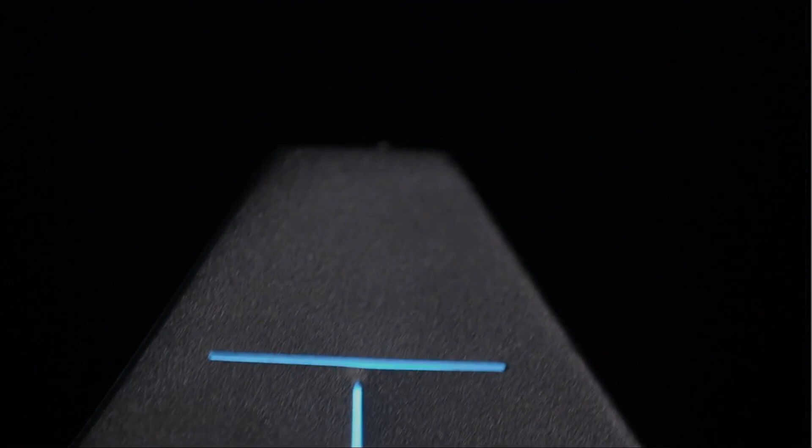Yesterday's thermal conductivity instruments typically limit characterization to a narrow range of sample materials. The samples are often forced to adapt to the instrument's rigid requirements, rather than the instrument adapting to the sample and application needs. Trident by industry leader C-Therm represents a new paradigm in thermal conductivity measurement, delivering 3 of the most powerful transient methods in one instrument.

It's better to have options. Built on C-Therm's reputation for world-class thermal conductivity instruments, Trident is dynamic and satisfies the most prominent ASTM and ISO industry standards. It combines the precision of MTPS with the flexibility of TPS and the robustness of TLS, all in one modular package. These options support a wide range of applications without sacrificing ease of use. Trident meets the needs of today's labs and is future-proof for the challenges of tomorrow.

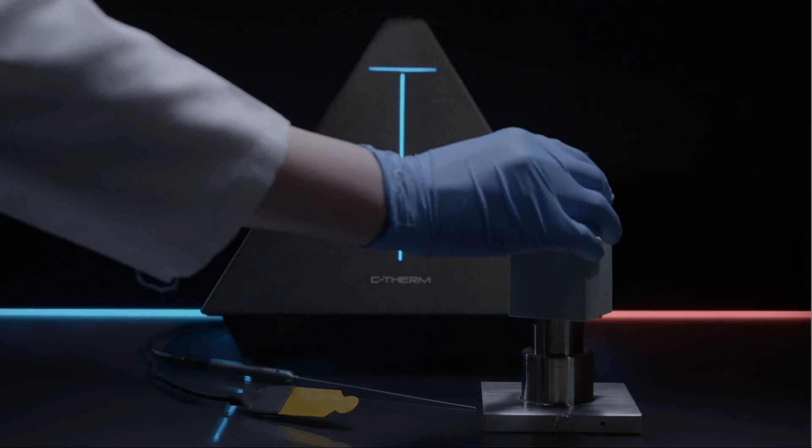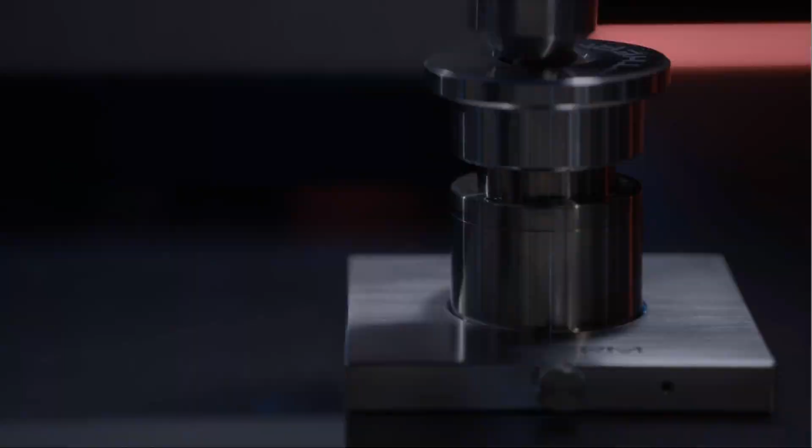The MTPS, Modified Transient Plane Source method, employs a single-sided sensor to directly measure the thermal conductivity and effusivity of materials. The method features the highest precision and sensitivity, providing accurate test results in seconds. It offers the maximum versatility for the non-destructive testing of solids, liquids, powders, and pastes. It is adaptable for high pressure, broad temperature ranges, and environmental conditions. No regression analysis is required. MTPS is the choice method for situations where reproducibility amongst multiple users matters.

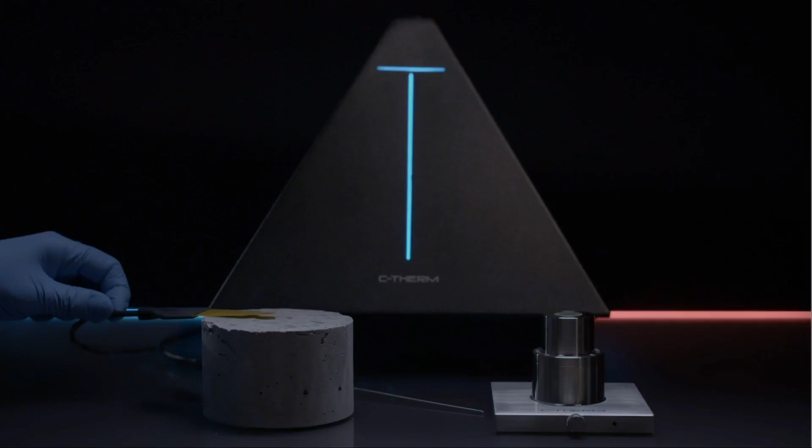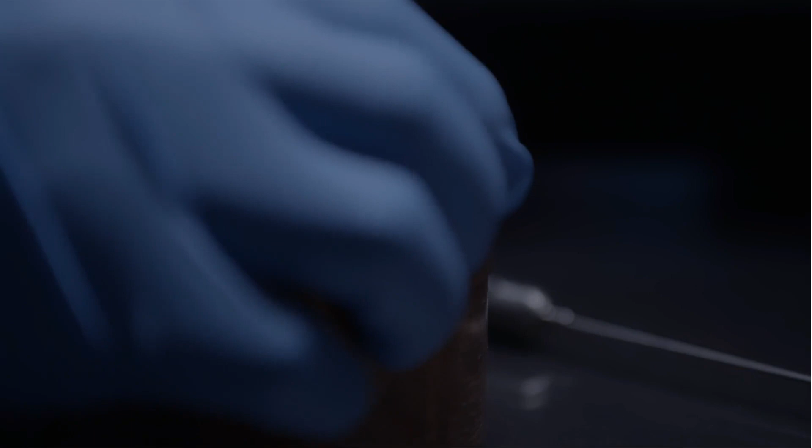With a double-sided sensor available in different sizes, the Flex TPS Transient Plane Source method provides researchers the greatest flexibility over experimental parameters, including timing and power. It is recommended for more experienced users with specialty slab, anisotropy, and thin film modules available. With no contact agent required, the hot disk-style TPS sensor is ideally suited for polymers, compacted geological samples, metals, concrete, and asphalt. Flex TPS is ideal for experienced researchers looking to push the boundaries in thermal conductivity.

Sheathed in stainless steel, the TLS, Transient Line Source Needle method, offers maximum robustness in thermal conductivity testing. TLS is best suited for granular materials, polymer melts, soils, slurries, and gels. C-Therm software provides full data acquisition and analysis in one user interface, allowing full control of all 3 methods: intuitive, logical, easy.

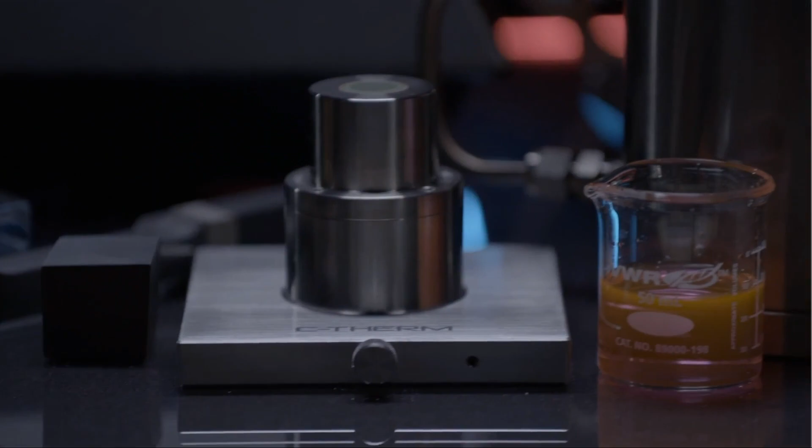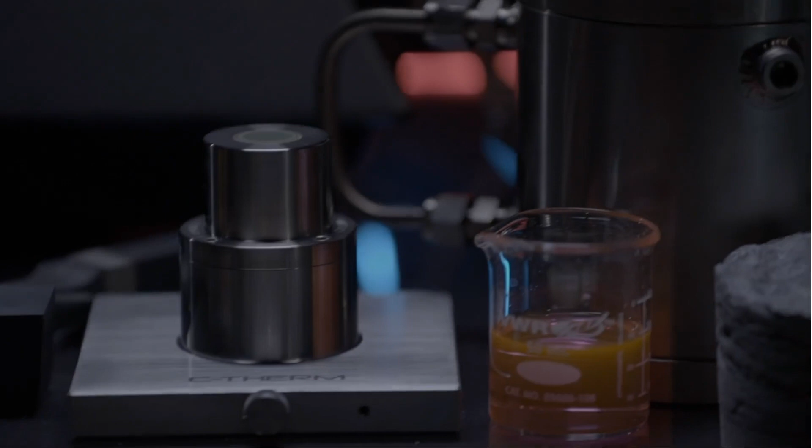Trident reflects C-Therm's years of experience working exclusively to provide labs, researchers, and manufacturers with the very best in thermal conductivity measurement. C-Therm's products are globally distributed in over 65 countries around the world, with full local support. Trident. It's better to have options.

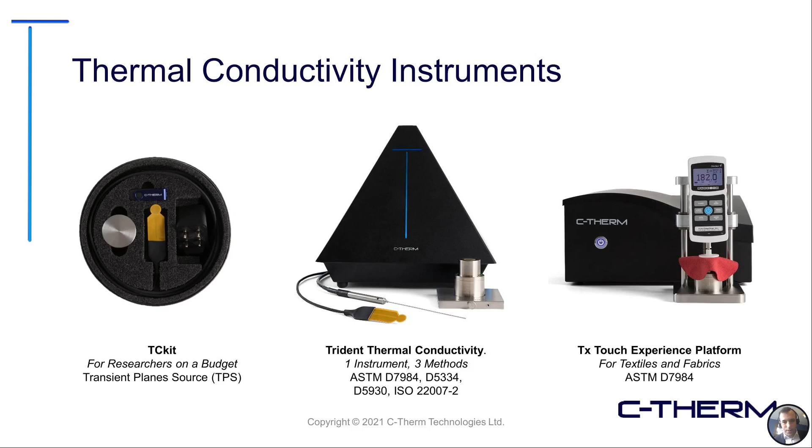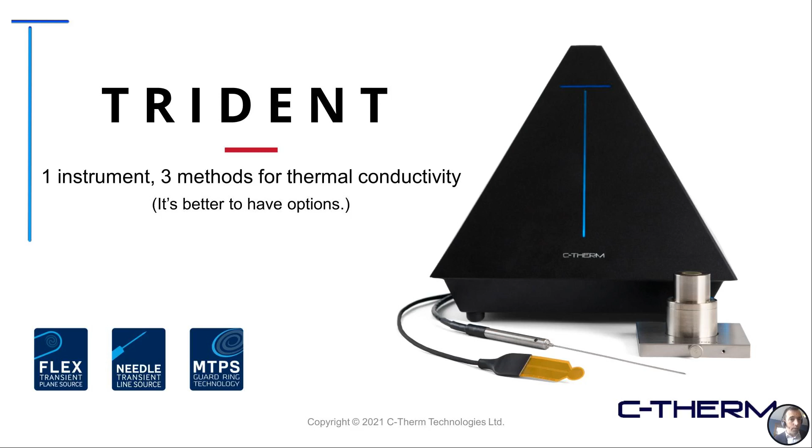So I talked a little bit about Trident and the combination of those three methods. So it's really one instrument with three methods for thermal conductivity. In our view, when it comes to thermal conductivity, it's really important to have options. I really like this quote from Abraham Maslow. If you've seen my presentations before, I think I repeat this a lot. I find it really captures and speaks to the value proposition of Trident.

And it's really that when we talk about thermal conductivity, when all you have is a hammer, if you only have one tool in your toolbox, everything looks like a nail, and you end up force fitting it into areas of application where it is not ideal. So really the value here is giving yourself and your lab the future-proof capability to deal with pretty much any situation, from solids to liquids, etc., all those different types of materials that you may face in your lab.

These are some of the different sensors available. You can see the needle probe here on the top right, just to give a bit of sense of scale and minimum sample volume requirements. The active area of this is about 150 millimeters, so it will require among the larger sample volumes.

Opposite end of the spectrum is a single-sided sensor, MTPS, with an active area of about 18 millimeters. That's roughly the size of a US nickel coin. Offers among the smallest sample volumes. The Flex TPS sensor in the middle is available in different size formats. That's 6, 13, and 30 millimeters in size.

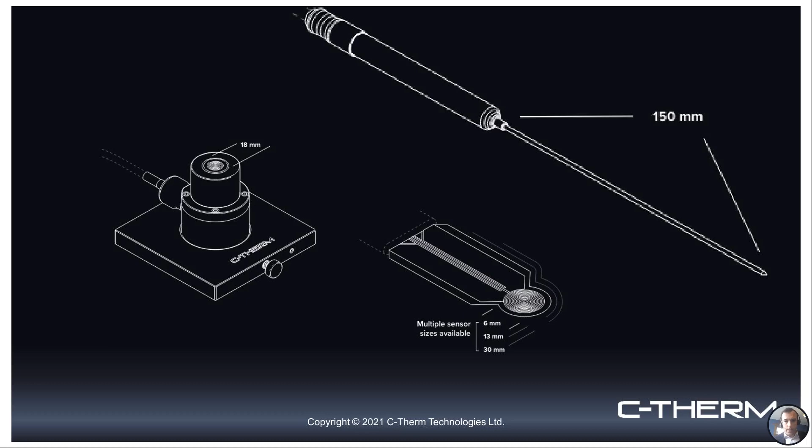Some different accessories available: the liquid and powder cell in the top left and lower left, the high pressure cell. I see some folks online that are involved in hydrogen research. Our unique capabilities with our high pressure cells, being able to measure conductivity and integrate our sensor in those cells, is of direct benefit to hydrogen researchers, where the kinetics of how those materials perform is related to the effective thermal conductivity of the material.

But one thing we really need to be talking more about in industry is that when we're measuring conductivity, we're measuring it under representative conditions. That could include humidity or temperature, but it also matters what pressure we're testing at. So if your material is going to be under a specific atmospheric pressure, it's best to test it under those conditions to truly get a representative value for how that material is going to perform. If you densify a material, for example, you'll typically cause an increase in its effective thermal conductivity. We have special gauges, our compression test accessory in the lower right, to control that very precisely.

So if you're working on a gap pad material, for example, this is very important, because a gap pad material is a thermal interface material. If you apply a lot of pressure on it, it's going to push out any air voids. If it's a filled material, it's going to improve the connection of the additive. It's going to bridge the bond line better. You're going to have a much better effective thermal conductivity on the material. But it's really important that it's representative.

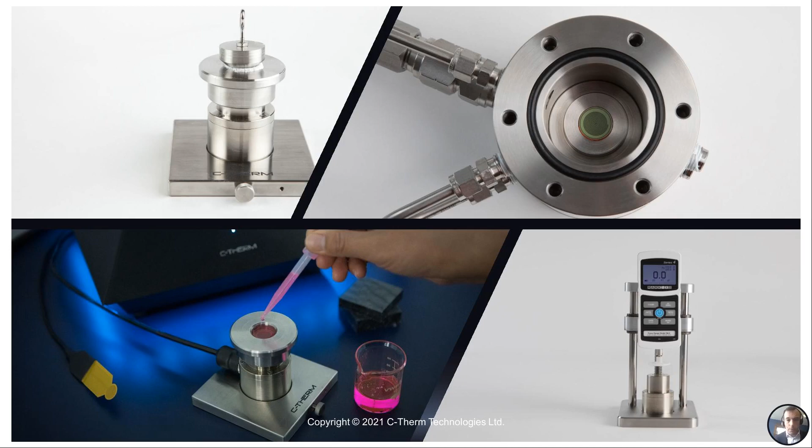So, we've seen examples where results have been presented and they look phenomenal, but when you go into the details of the gap pad and how it was tested, it might have been done with 1 ton force. If you're looking at applying that type of force in your electronics package, that's fine. But I think you risk, in a lot of cases, misrepresenting that real performance.

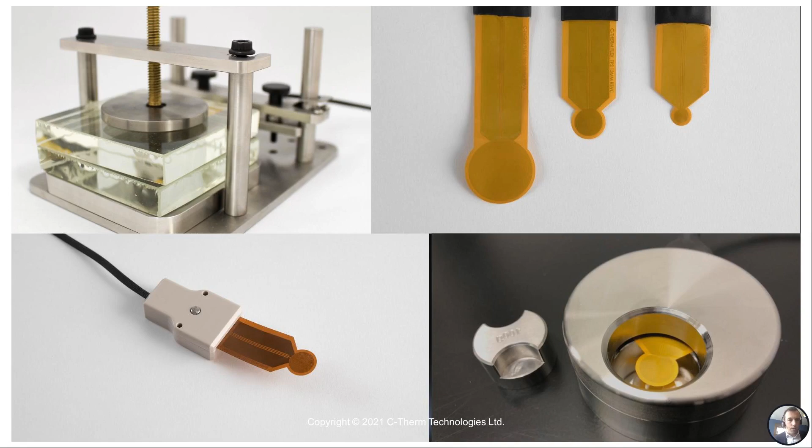The next slide here just gives you a sense of some of those different accessories on the Flex TPS. Top right, you see some of the different size sensors available, the TPS sample clamp, the powder cell, and the high temperature sensor available there. I want to just take a moment to speak to those special utilities available with the Flex TPS. There's the slab TPS utility. So if you're dealing with aluminum sheets or different highly conductive metals, the slab gives you a great solution.

Instead of applying a transient method, which typically requires for the duration of the measurement that heat that's introduced with the sensor stays within the boundary condition of the sample, that condition can be avoided with the slab method specifically, with that utility where you'll input the thickness of the material. And it just gives you an effective way to really deal with high conductivity sheet material.

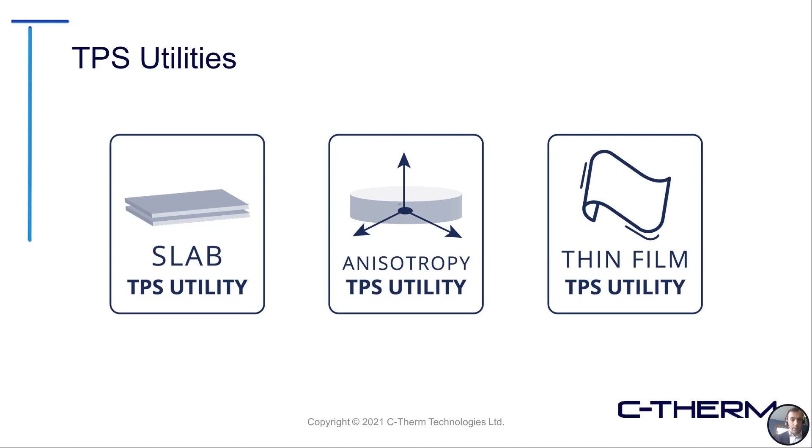The anisotropy utility, great for oriented materials and thin films. We know, of course, in batteries, the separators and some of the other encapsulation materials, it's very important that we have a way of understanding the conductivity of the thin films themselves. A lot of those are used in this space, so a nice capability there.

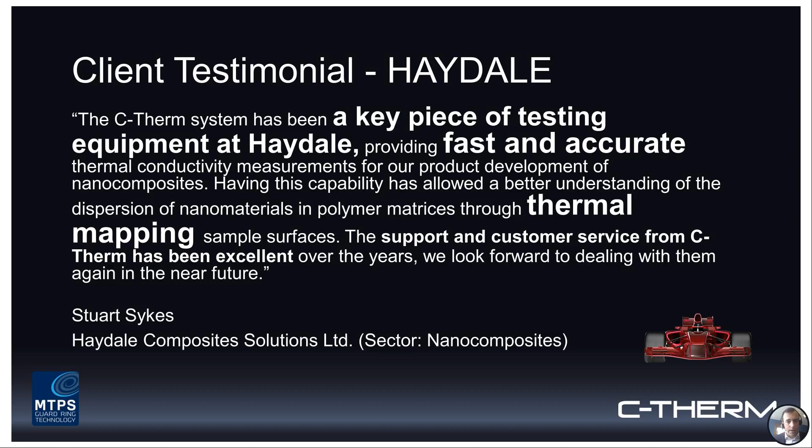And a nice general reflection on what a key piece of testing equipment it has become at Haydale, offering that fast and accurate thermal conductivity testing. And then the last one I'll just highlight here, and it's a quick highlight, is from Covestro. That's formerly Bayer Polymers in Germany. Just talking again about how fast and accurate the capability to measure thermal conductivity of their polymers is.

They're using this both with the MTPS method, which is providing that quick and easy reliable measurement, but they're also using the needle probe for some of their polymer melts. So it just speaks to that value of having a few of those different methods available.

Now, as I introduce my colleague Aria, who's really going to take the reins here and do a deep dive on how C-Therm is helping accelerate thermal conductivity characterization across a broad range of materials involved in the development of electric vehicles, I just wanted to talk a little bit about why speed is so important and the pressure we're all feeling to quickly get to market.

So this is a little bit different than a lot of other application areas where we work with manufacturers, with other technology companies, and it's a very iterative process. It's a methodical process. Yes, there are pressures and there are improvements made in a wide range of these areas, but this feels very different when we talk about electric vehicles. The pressure here, I think, is immense, and it's really important to understand what is happening with the disruption in the automotive industry.

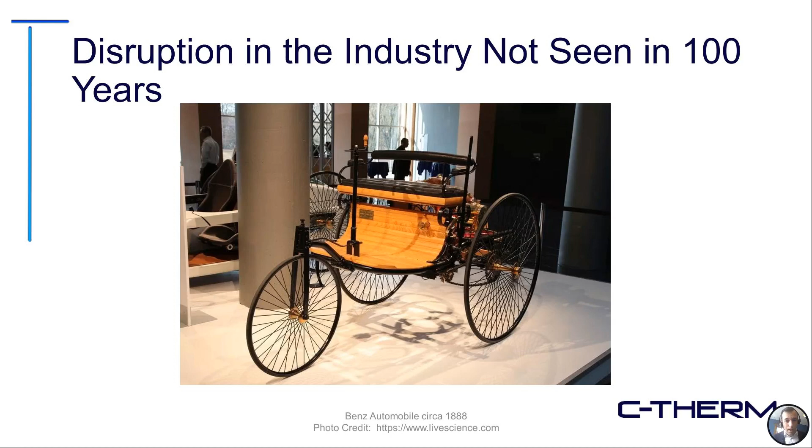And really, I think if we think back in the automotive sector itself, we have seen this. It's just we saw it about 100 years ago. So I think, and I'm going to approximate here a little bit, history was not my forte, but around the late 1880s, you see, I think, consensus around the first automobile really being available or invented. And then it's about another 15 or 20 years before we really see wider scale adoption. So it's kind of interesting if you think of electric vehicles and some of the early introductions over 2005, moving forward. They're there, but you're not seeing that adoption in a mass scenario.

But what's really interesting in this observation is just how fast it flips. It's like a light switch. It goes really quickly once it hits that kind of inflection point. And so there's this really interesting example provided of looking at New York City, Fifth Avenue, circa 1900. So this would be about 12, 15 years after the invention of the automobile. And if you look on this street, a very modern city at the time, you see all these horse and buggies, but you can pick out maybe one automobile.

And then if you fast forward to 1913, so in 13 years, I just want you to reflect on the significance of that pace of change. And you look at the streetscape. It's very difficult to pick out a horse and buggy. They're almost all automobiles at this point. And so it's a good example, I think, of what we're seeing with the challenge of bringing electric vehicles to market, that we've hit the inflection point.

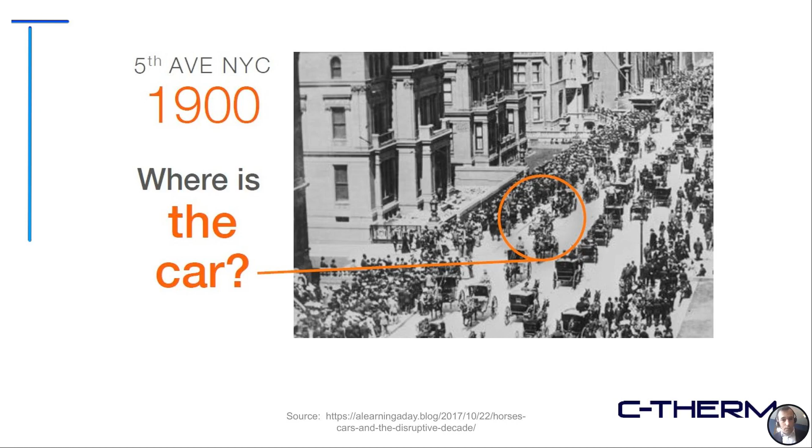So, it's very anecdotal, but if you look at the history, if you look at the experience in terms of adoption and just the general sense of the market, we've hit that inflection point, and we probably don't have as long as we think. If you're one of those horse and buggy producers in 1900, I don't know how many of those survived post 1913. I think they probably thought they had time, that they were on a slow decline, but that they would sustain themselves in a gradually reducing market. And I think what really they found is it was like somebody just turned the lights out on them.

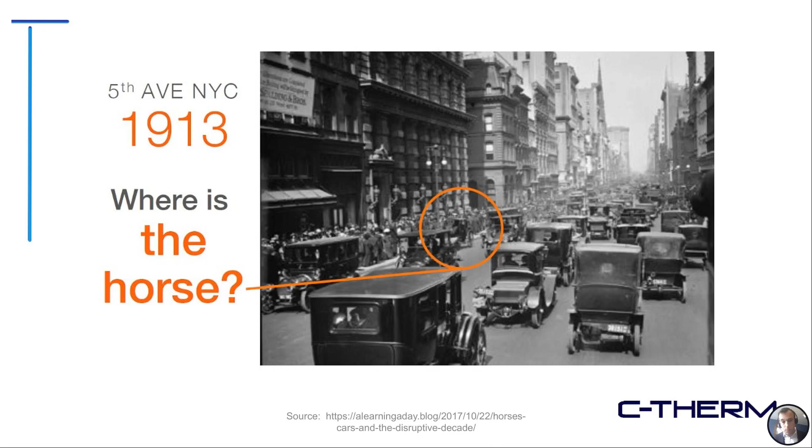And so that's the pressure we're dealing with here when we talk about getting to market with a product that works, that has the safety, that has the performance range, all those things necessary to be successful in the electric vehicle market.

So I want to introduce my colleague, Arya Hakimian. He is a brilliant young fellow, application scientist here at C-Therm. Works a lot with clients in this space. He's going to be highlighting some different work that's been published and some of the work that we've produced internally and giving you a full picture, a survey effectively of all the different materials that are involved in electric vehicles and why and where the thermal conductivity matters.

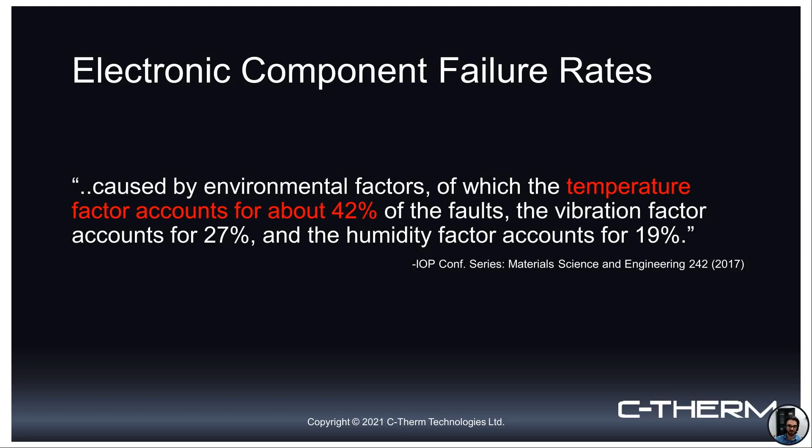A little fact that we pulled here on electronic component failure, just to address the fact that temperature accounts for about 42% of the faults that occur. There are other aspects, vibration, humidity, and then some others that aren't listed. Of course, it's a multifaceted issue, but again, temperature can be viewed as being at the core of some of these issues.

So we're talking about thermal management and issues surrounding that. Really, this can come back to a process called thermal runaway. Essentially, this is where you get an increase in temperature through some sort of reaction that introduces heat to the system, which furthers that reaction. And if you do not have adequate heat escape, whether that's through the process, the materials, cooling systems, whatever that may be, you can get stuck in this feedback loop. And if unchecked, this can result in what we would describe as a destructive event.

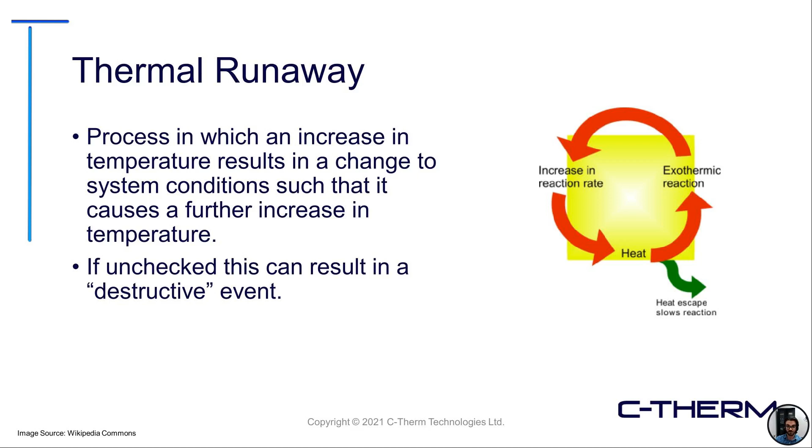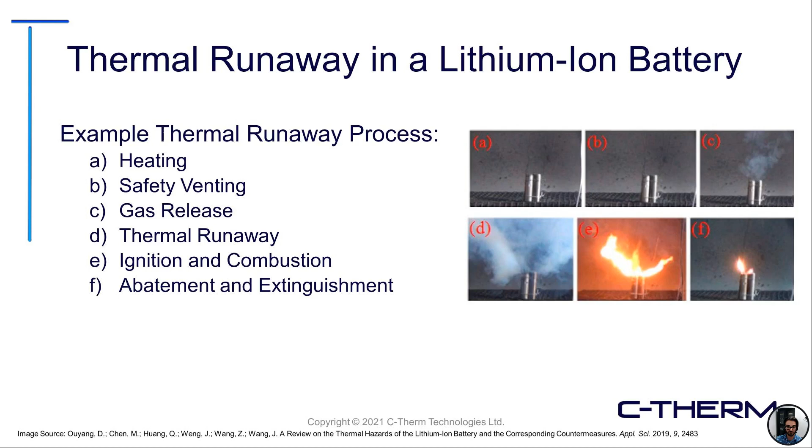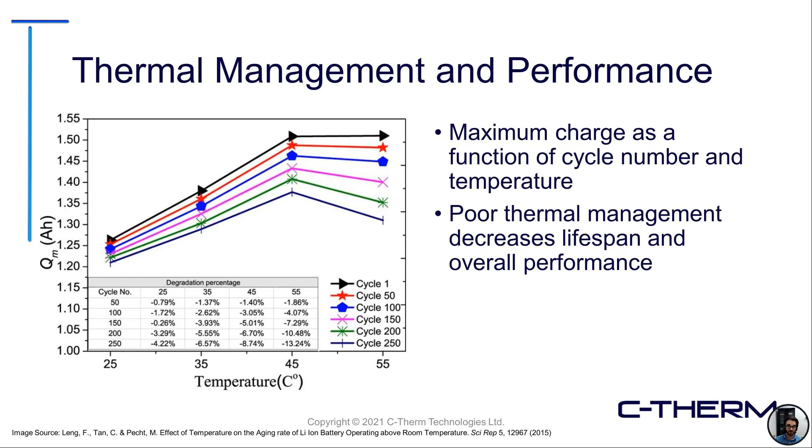Thermal management also relates to performance. So, thermal runaway is a major safety concern, but the performance of an instrument or a device can also be heavily impacted if it is not being accounted for. You can see here just a quick graph. Maximum charge as a function of cycle number and temperature. So again, this is a lithium-ion battery, how often it is cycled and at increasing temperatures. And you can see effectively that over the lifespan of more and more cycles, you get an overall decrease in performance. So whether you're looking at it purely from a safety aspect or a performance aspect, thermal management is really front and center for these emerging technologies.

So how do we cope with this? How do we effectively reduce these risks? Well, essentially your thermal management can come in different forms. There's passive, active, hybrid cooling techniques. I'm sure we're familiar with heat sinks, thermal interface materials, forced air intakes, things like this. But regardless of the type of management that is being introduced, really the components' material selection is going to be very heavily weighted in the overall performance attribute. Whether that's of the pure system itself, of the cooling system, or both, material selection is going to be very important. And what we'll be focusing on today is material selection from the perspective of thermal conductivity being the key design metric.

If you're not familiar with thermal conductivity, at a very high level, we're simply referring to the property that dictates a material's ability to transfer heat. You can see that thermal conductivity has units of watts per meter Kelvin. And this comes from the measure of thermal energy input in watts across a given thickness at a given temperature difference, so watts per meter Kelvin. And really, this is what we'll be focusing on fairly exclusively here today.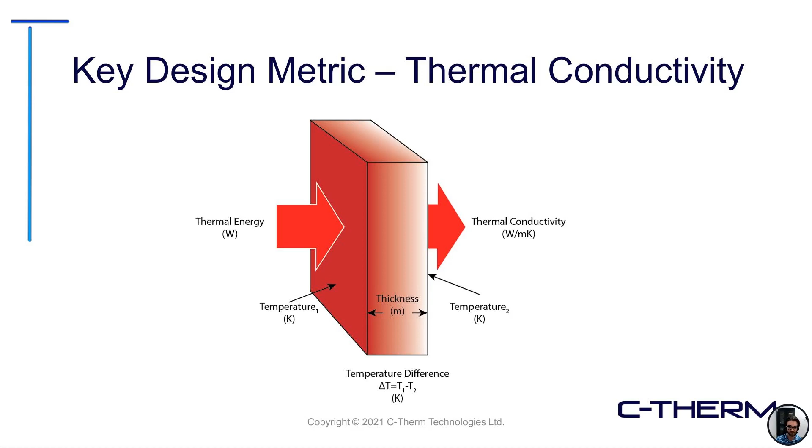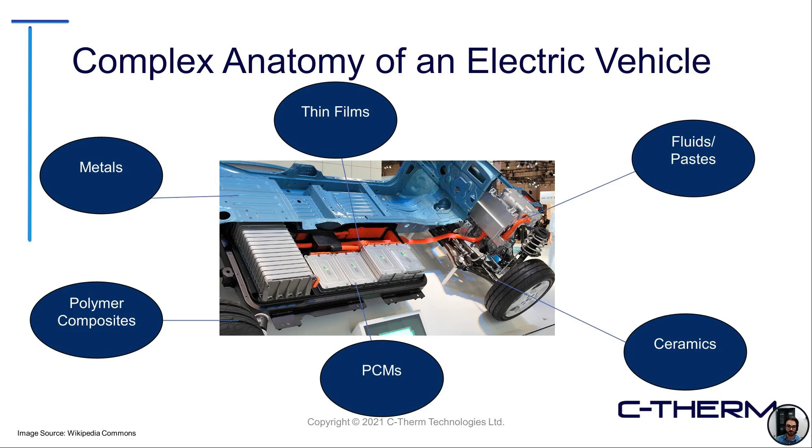And again, Adam really covered this well earlier, so I won't be spending a lot of time, but just to highlight here, transient methods for thermal analysis have some really key benefits when we're talking about not only the versatile sample type, but really the speed of analysis, very flexible sample sizes. And again, our three main methods of discussion here today are the modified transient plane source, MTPS, the transient plane source, TPS, and transient line source, TLS, all of which are available on the Trident platform.

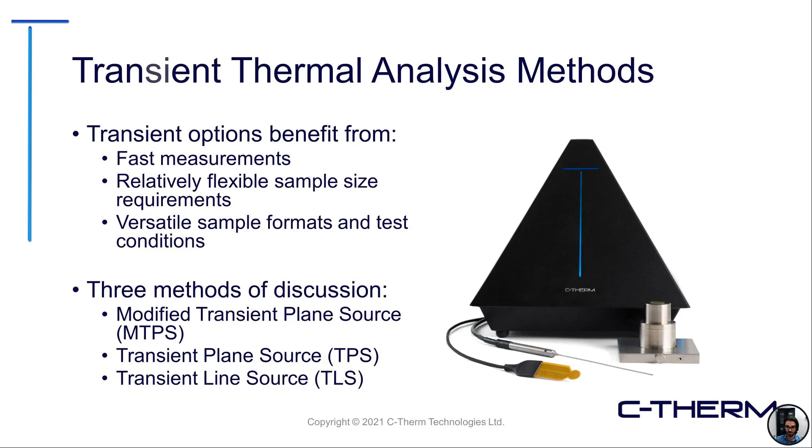So I figure we jump right into some examples. There will be some in-house data that we have collected and others like this where they are various academic publications. We'll take a dive. This first one is looking at battery thermal management systems. This is from joint work coming out of Canada and the US. And really in this study, they're aiming to moderate temperature by developing a battery thermal management system, or BTMS.

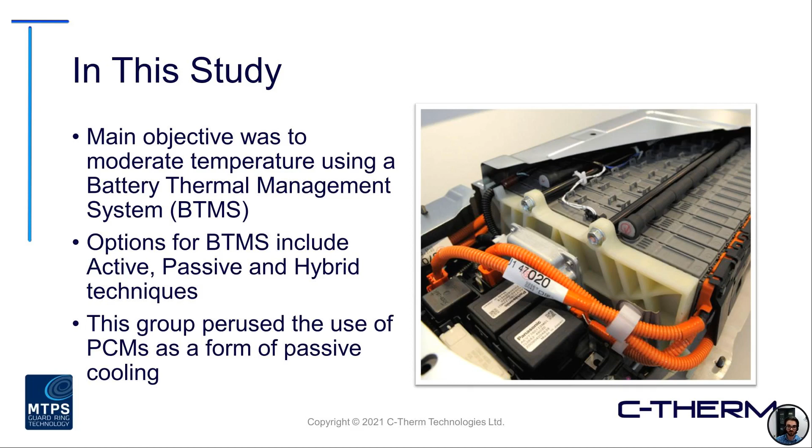Again, these thermal management techniques, coming back to those previously mentioned options, can be active, passive, or hybrid techniques. And in this case, the group decided to move forward with PCM, so phase change materials, as a form of passive cooling.

Now, when we're talking about PCMs for batteries, there are some very specific challenges that can be faced. If you're just talking about a pure base PCM, generally they're not going to be sufficient alone during aggressive operation. When you really push those temperature limits, they have a certain point of diminishing return. Certain properties such as unfavorable thermal inertia, limited available latent heat, and again, what we'll be focusing in on is that low thermal conductivity.

So what this group proposes as a solution, which you'll see a lot of groups working with these additives, is adding a material to that PCM to enhance the effective thermal conductivity and ultimately improve on the temperature regulation properties.

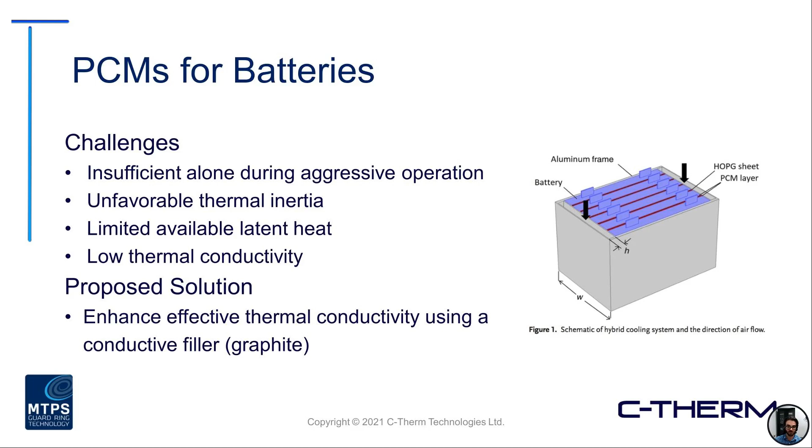I just put this little image here of the MTPS. This was the device used in this study, and whenever we talk about PCMs, it's really important to note that, if you didn't know, phase change materials, we're referring to something that can have a change of phase, so perhaps going from a solid to a liquid. Not all measurement techniques are appropriate. If it's appropriate for a solid, it may not be appropriate for a liquid, and vice versa.

But with the MTPS, it's very versatile, can handle solids, liquids, powders, pastes. It's really great for this application space. But how you'd actually go about testing a PCM, let's say in its solid form, you would place it on the sensor, and then if you bring it through a melt point, you can see there's the liquids and powder cell on top of the sensor, which is used to contain the non-solid material. So a really great option for testing completely through the phase change of a sample.

So just looking at some of the results that were obtained here, we can see from the graph on the left, or table on the right, compared to the pure wax, so the pure PCM that was used, again, fairly low thermal conductivity as was expected across the full temperature range. But you notice that by increasing the additive or the filler material here, you're noting a fairly significant increase in thermal conductivity going from 5 and 10% loading.

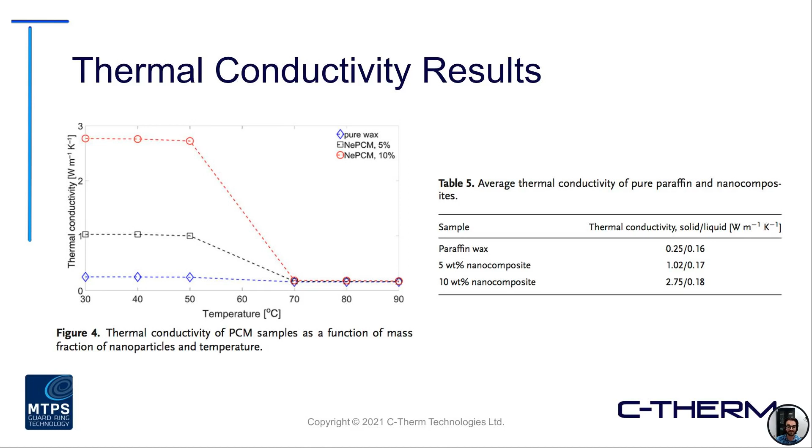You do notice that as you also analyze this data as a function of temperature, in its solid phase, we're getting a very distinguishable difference, but important to note that when you do approach that liquid phase, that transition of phase here, you do start to see some, I'll call them diminishing returns at the upper end. And again, this is simply related to, you can imagine a solid material has really good conduction pathways. As it becomes more of a liquid state, the disorganization of that matrix has a quite notable effect on the effective thermal conductivity.

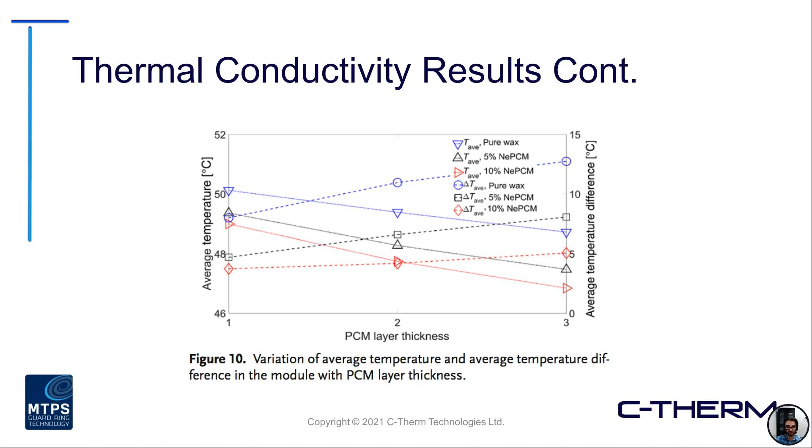But really here, they were able to show that the average temperature of the system was much lower when you added in that additive to the base PCM. Also looking at it in the sense of increasing PCM layer thickness, you note that the average temperature does show a steady decrease with PCM layering related to the increased additive that is present.

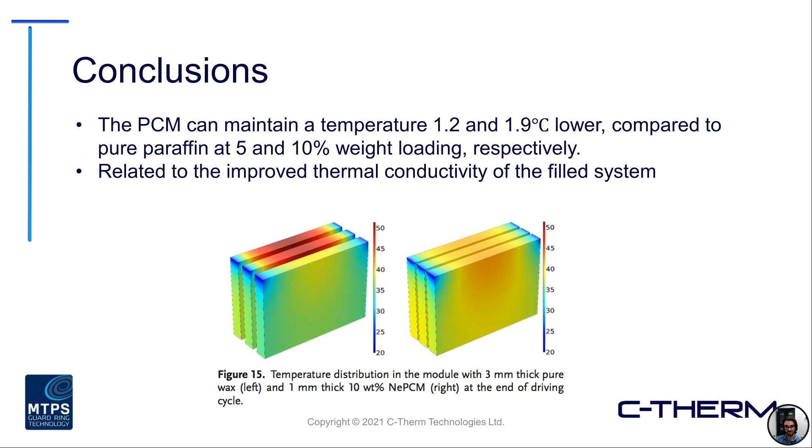So ultimately what they were able to conclude, taking this data, going in through some simulation studies, is the PCM can maintain a temperature about 1.2 and 1.9 degrees lower compared to the control at the 5 and 10% weight loading, respectively. Ultimately, this all comes back to the improved thermal conductivity of the filled system. So really just demonstrating in a very simple sense here that the effective thermal conductivity can have a very large impact on the overall temperature that will be imparted into your system.

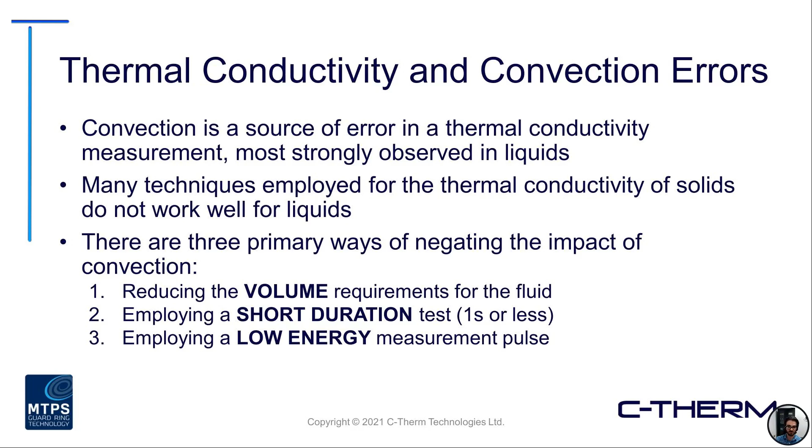So when we're talking about PCMs going from that solid to liquid phase, whenever we're talking about a liquid form or a fluid, it's really important to just add a quick note here on convection. Convection can be a main source of error for a lot of liquid testing. It is something that's fairly well known in the industry, and it's something that you need to take into account. The best ways to negate the impact of convection, there's a few approaches: reducing the total volume, using very short test durations, or a low energy pulse measurement. So decreasing the total delta T that's introduced to the system during your measurement.

With the MTPS, again, this is one method that we focus in on a lot because it has some really great advantages here, particularly to liquids, particularly non-viscous liquids. Your standard MTPS test duration is about 1 second. So you can see that having a very short test time has quite a few benefits, being a non-destructive method, and in this scenario really reduces, or I should say completely avoids, the introduction of any convection in your media.

If you were to increase the test time, and you can see this simulation that was performed at about 5 seconds, 11 seconds, you start to see more and more of that convection wave build. And then when you're analyzing on the upper end of around 14 seconds, which granted isn't that long of a test time, you do notice these quite large convection errors that can be introduced. And if you look in the literature and standards for other methods that deal with liquids, some of them state test times even longer than this. So it's something that you really need to take into account when you're designing your testing setups.

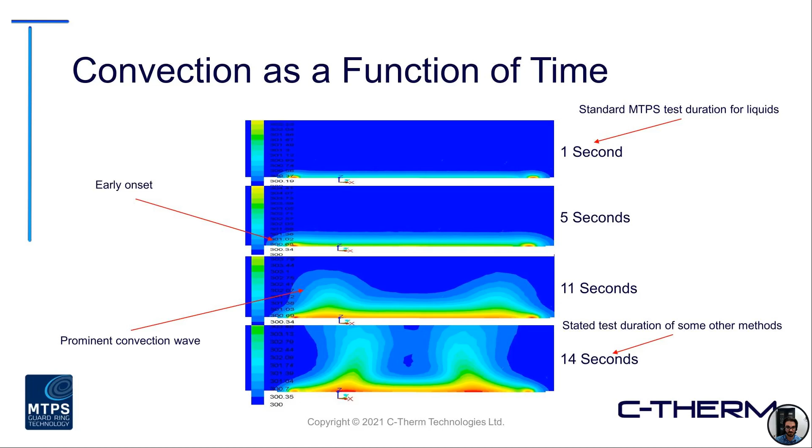So just a few takeaways here. I personally work with quite a few groups that are dealing with these advanced materials, finding the best ways to test them. And I always try to impart a few tips and tricks on how to best analyze the data, but also how to report it. It's really good if you can take a look at not only just the final value that you're getting, but also some of the more particular information from the test, perhaps the temperature versus time plots, residual error plots. These can show signs of convection errors that may not be obvious in that final value.

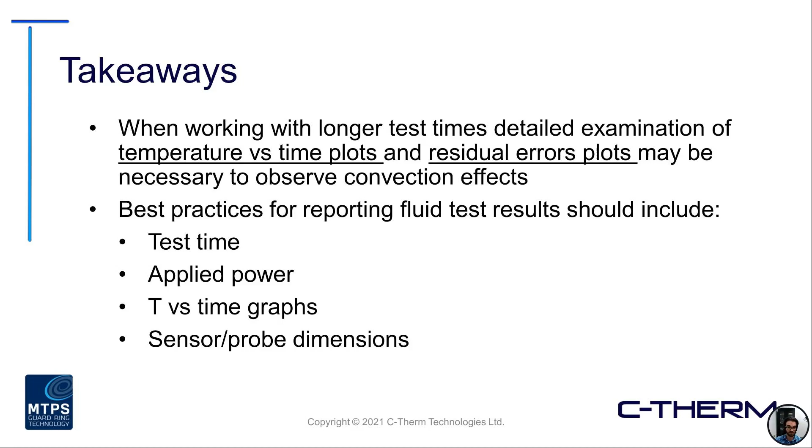When you're reporting these results, whether it's for internal companies or if you're a lab doing these reports for other groups, take note of the test time, the applied power that was used, even the sensor probe and dimension. These are things that can be really important to take note of, because if you're not reporting these, sometimes it can be really hard to compare your results, especially if you do get discrepancies between different methods and different groups. So having as much information available to you is always going to be the best tool that you can use.

So continuing on the aspect of liquids testing, Adam mentioned earlier, and it made a really great point, that you not only want to get good data, but you want to test in a way that is representative of the in situ or real world condition. So, one example you might think of is a cooling system, a closed system that has a liquid inside of it. If you're increasing the temperature of that system, you're most likely changing the partial pressure inside. So having an understanding of how the properties trend as a function of not only temperature, sample format, but pressure can be very important in some of these scenarios.

One option that we offer here at C-Therm is these high pressure cells. They have the same MTPS technology that we've talked about in the base configurations, but giving you the added capability to test under varying pressurized or gas environments. And again, really all this does is give you the ability to fine tune your testing to be truly representative of the end use condition.

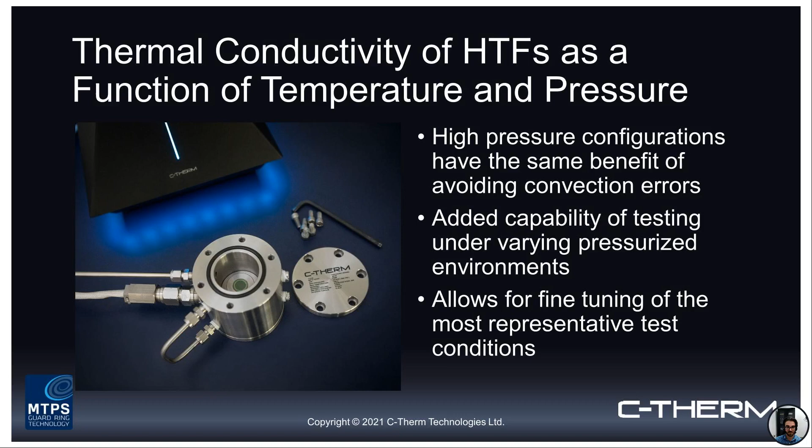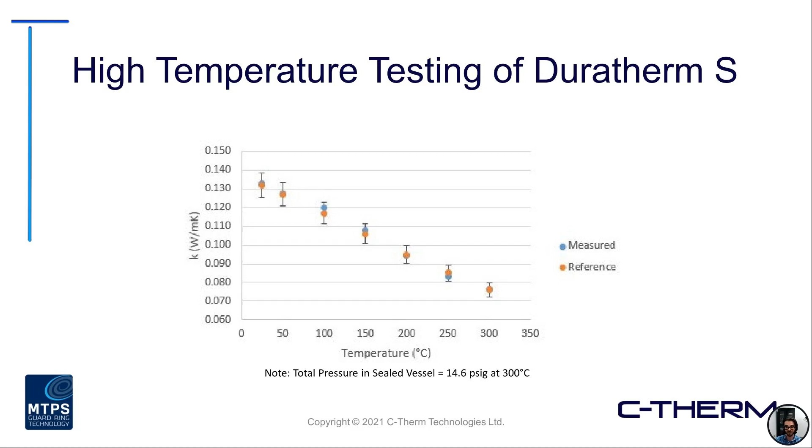We see here some example data collected with the MTPS high pressure cell on a Duratherm material. This is a heat transfer fluid. You can see the trend in thermal conductivity as a function of temperature. Really good agreement with the measured and reference values, but just noting that the pressure of the sealed vessel was introduced in this testing. So we made note of that pressure and continued with the analysis under those representative conditions. And again, if this was something that you're just testing in the ambient atmosphere, other issues can come into play as well, but also you may not be getting truly representative test data.

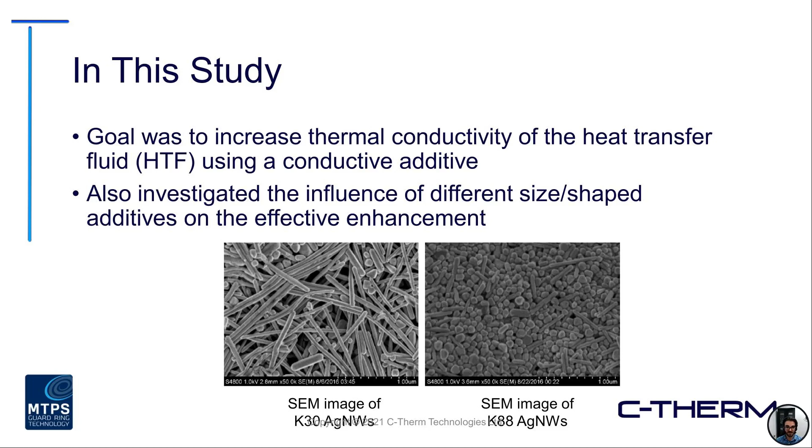So going into another example here of some work done in academia, enhanced thermal conductivity for nanofluids, and in this case looking at silver nanowires as the additive, but taking a look at how different shapes of your additive can come into play. And this is some work coming out of China. In this study, their goal was to increase the thermal conductivity of the HTF, the heat transfer fluid, using a conductive additive. But again, really making note here of the effect of the different shape of that additive. So it's the same material, it's a silver nanoparticle, but in different size and shape formats, as you can see from the SEM images at the bottom there.

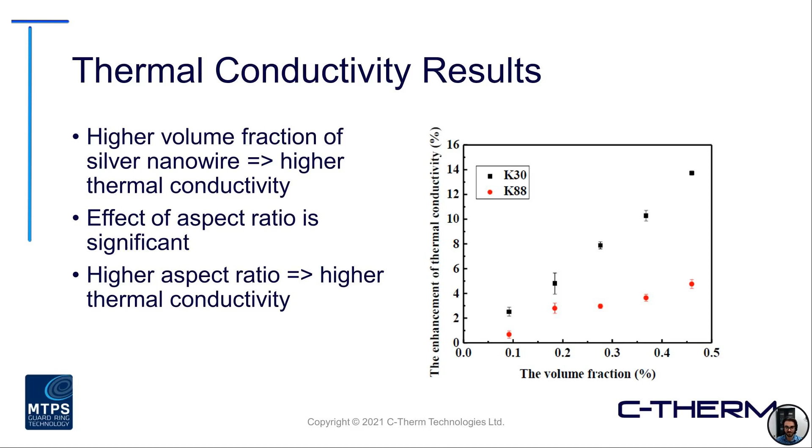So what they found from their results is essentially, as you would expect, the higher volume fraction led to a higher effective thermal conductivity measurement, so a greater enhancement of that thermal conductivity. But also the effect of the aspect ratio, or the size of that additive, was rather significant. They noted that the higher aspect ratio sample also had a generally higher thermal conductivity compared to the one that was lower. So even though it's the same material being added, size and shape can have a very drastic effect as well.

And then here a note on investigation of thermal conductivity of carbon nanotube reinforced composites. So this is coming out of some work out of Europe, Romania and France. This is diving into some more, I'll refer to as traditional automotive components. So, rubberized tires. And in this study, it really relates because the wear and tear on a tire can be directly related to the thermal stress under active use. So the study aimed to improve that effective thermal conductivity to reduce that thermal impact and, in one aspect, improve the longevity of that material.

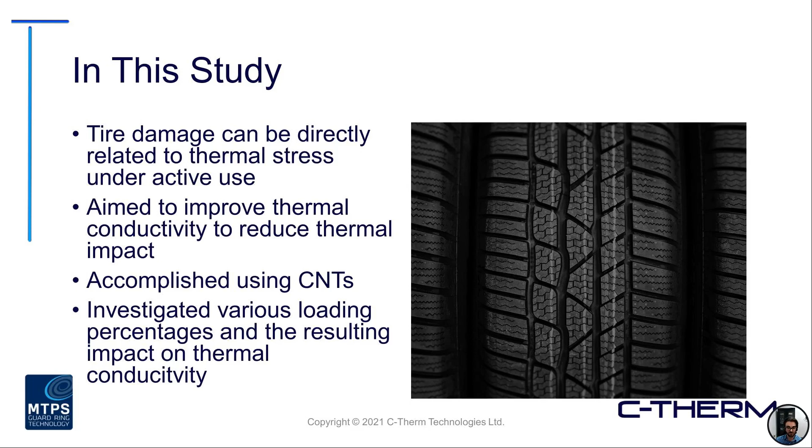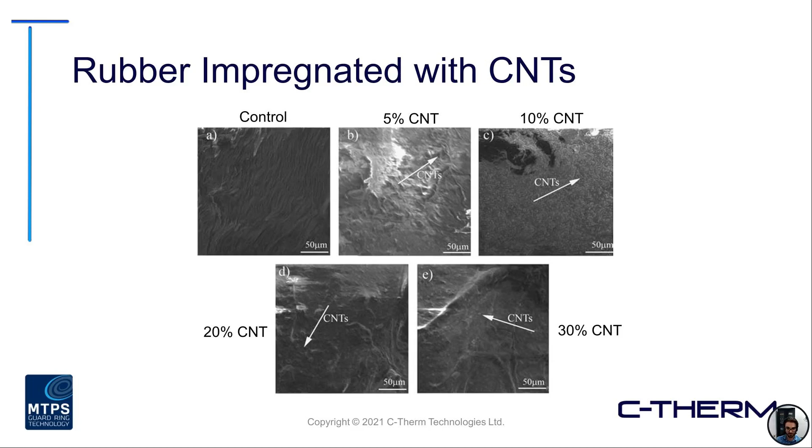So these investigations were done on different loadings of carbon nanotubes into the composite matrix. So the rubber was impregnated with CNTs at different weight loadings, 5, 10, 20, and 30%. Based on the SEM images here, the CNTs may be more pronounced at the upper loading. But really what they found was, as you would expect, the higher loading of the CNT resulted in an increased thermal conductivity. There's about a 26% improvement at the 30% loading compared to the control. And they noted that this material was evenly dispersed throughout the matrix.

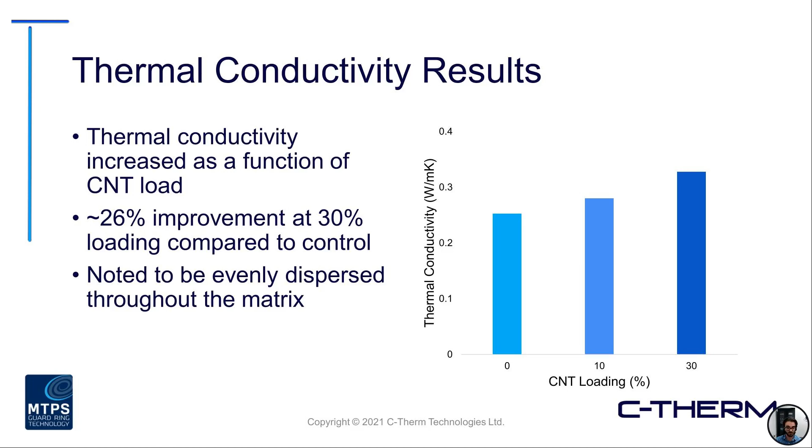So if you do have good control over your dispersion, that is going to be very important for getting quality and accurate measurements. But again, the story that we see quite often is introducing more of that material will increase the effective conductivity. And granted, there are other properties that will change with different weight loadings. But definitely from the perspective of thermal conductivity, we see that net improvement.

So we talk here about these additives and these fillers, and Adam alluded to this earlier: surface mapping, filler detection. This is something that we've brought up a few times in some previous webinars. If you'd like to dive into it more, some of the previous webinars that were posted really go into this, and we also have some additional resources if that's of interest.

But with the MTPS, you get a really great additional measurement tool in your toolkit, and that's the ability to map out the surface of a sample and perhaps detect if you are getting any localized agglomeration or buildup of that filler. So in this rapid screening approach, in this example here, we had an epoxy resin with a conductive metal nanoparticle added, and it was done on purpose to be non-uniform. So visibly, we could tell that this sample is non-uniform.

But to help illustrate the point for examples where maybe the sample that you're working with isn't visibly detectable, maybe it's an opaque material where you can't see the filler, the way to actually detect this can be done again with the MTPS by doing these rapid screening measurements at different surface locations.

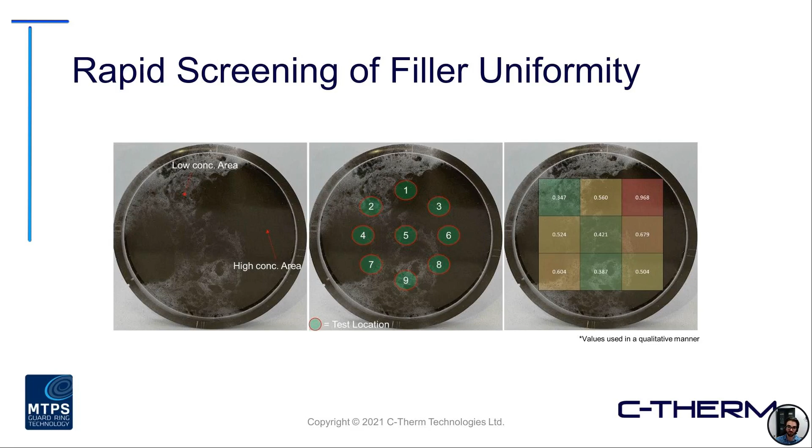And what we were able to show is, if you can see those measurement locations labeled 1 to 9, areas that had higher filler concentrations, such as location 3, resulted in one of the highest effective measurements. Whereas location 2, with less of that filler in that area, had a much lower value. So whether you're looking to get that absolute quantitative measurement or more just a rapid screening tool, the MTPS can provide you with some really powerful options here.

So taking a little pivot now into TPS, the Flex Transient Plane Source. It has some really great applications in this space as well. One of which we'll take a look at is a more simple measurement approach, which is the bulk configuration on brake pads. If you've been in the automotive industry, you know that brake pads are going to be crucial from a thermal aspect with respect to stopping power. So how efficient that brake pad is at slowing you down can be directly related to that thermal property.

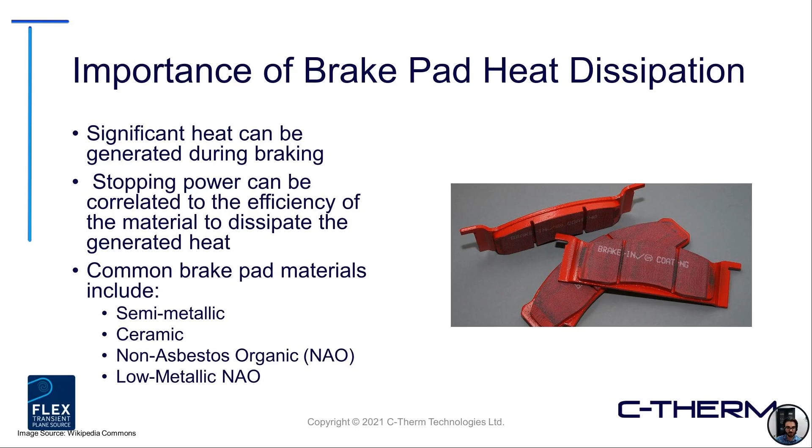Traditional brake pads used to be made of just pure metals. Obviously, those are very heavy, and with the ever-increasing improvements to make lighter materials, they've started branching into different material types. So there's semi-metallic, ceramic, non-asbestos organic or NAO, and low metallic NAOs as a few examples here. So depending on what type of brake pad you're using, you may have different thermal performances, and these different materials come at different price points.

So in the example that we're looking at here, some results on testing both a semi-metallic and a ceramic brake pad. The semi-metallic was much cheaper, ceramic was a little more expensive. But what we actually saw from just a thermal conductivity perspective was a much better performing brake pad that was actually cheaper, looking at the semi-metallic component.

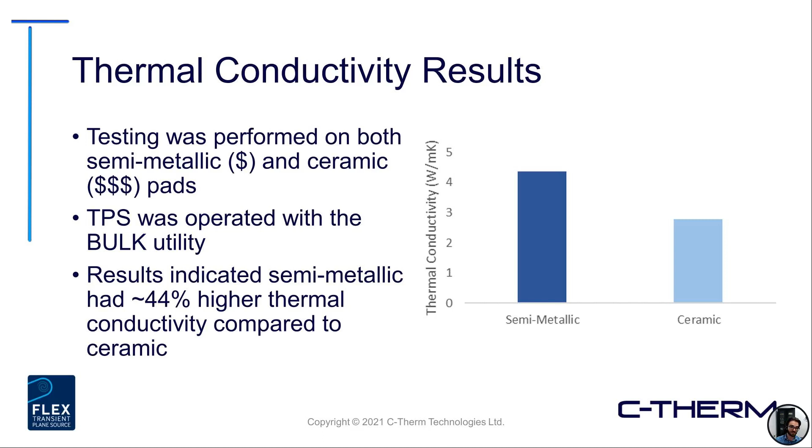Now, again, there's various other aspects here. If you're a car enthusiast, you know about the noise your brakes can make, the dust buildup. There's a lot of aspects that need to be considered. But from a thermal management side of things, we can see that throwing more money at something doesn't always necessarily yield better results.

So another use of the TPS sensor, specifically looking at the anisotropic utility when it comes to polymers. This is something that we've seen across quite a range of application fields in recent years, but again, very applicable here to EVs as well: finding a way to really test that directionally dependent material type. So just as a quick overview,

isotropic versus anisotropic materials. Essentially, anisotropic are those that have a directional dependence to them. So if you take a look at that cube with the X, Y, and Z axis, an isotropic sample is one that would have the same thermal property in all directions. However, if you had something that was anisotropic in nature, you may have differing in-plane and through-plane thermal conductivities, or even in some instances, perhaps if it was an additive manufactured printed material or just some filler, you can have samples that are fully anisotropic, where your X, Y, and Z directions are all different from each other.

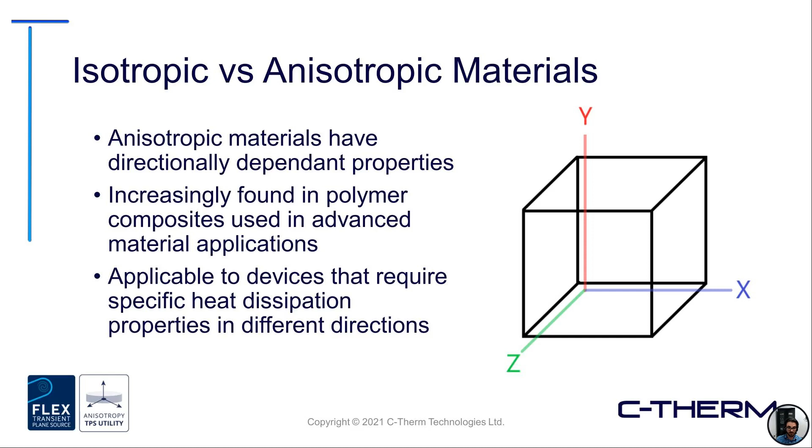So there are certain limitations to the TPS method. You are limited to those that are orthogonally anisotropic, so your in-plane can differ from your through-plane. If you were dealing with something that was fully anisotropic, just as a note, this is something that you would need to test exclusively with the MTPS sensor, and we're definitely happy to follow up with anyone that may have questions on anisotropy. But again, we'll take a look at some data that was collected here.

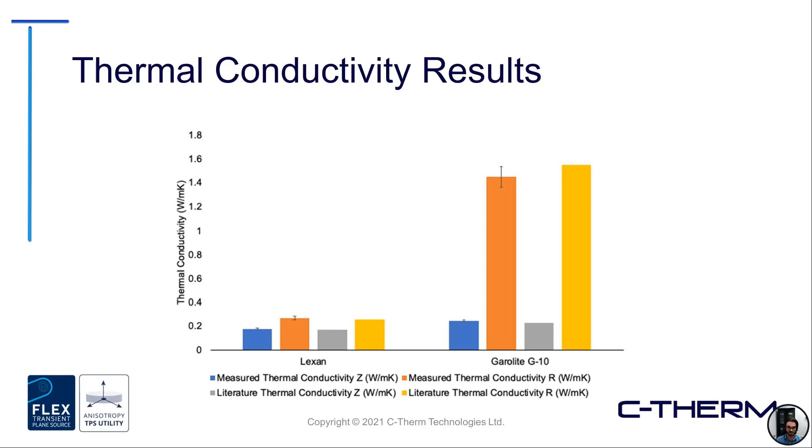Again, just some simple examples, and in some instances, the difference between that in-plane and through-plane direction can be viewed as minimal, from the example of this sample on the left, or it can be more pronounced, looking at the example on the right. But in either case, the TPS anisotropy utility is a great measurement tool for these types of samples, and it can provide you some really important information with respect to the directionality in the samples that you're working with.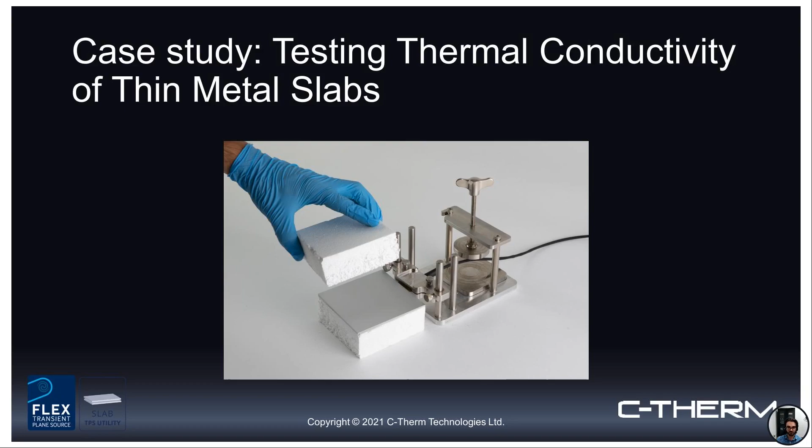And another note on one of the other advanced utilities with TPS is looking at SLAB. So Adam mentioned earlier, SLAB is really great for thinner materials, really metallic sheets as an example, or an emerging market that is really great for this measurement technique. Essentially with SLAB, it follows the same measurement principles, but you get a slight difference with the thickness requirement. So in this example, we were testing some aluminum sheets, about 1.75 millimeters in thickness.

It does require a slightly specialized test setup compared to your base TPS measurement. You actually have an insulative backing layer on the top and bottom of each sample. In this case, we're using EPS foam. But again, looking at some of the results that were obtained on this grade of aluminum compared to the reference value, conductivity, and also diffusivity, well within what we would expect with our final measurements here.

So there are certain instances where these metallic materials have a limit in your sample thickness that maybe makes them non-viable for other measurement techniques. And again, the whole idea here is it's really good to have options, and transient will always be amongst the fastest measurement tools, especially when you're dealing with this type of market where speed is of great importance.

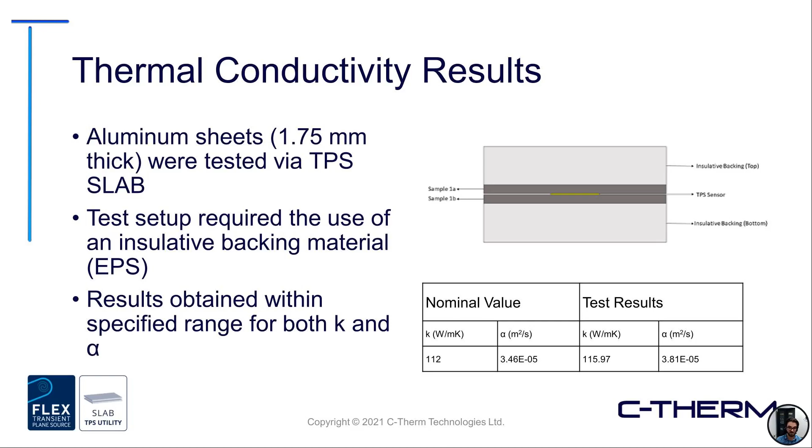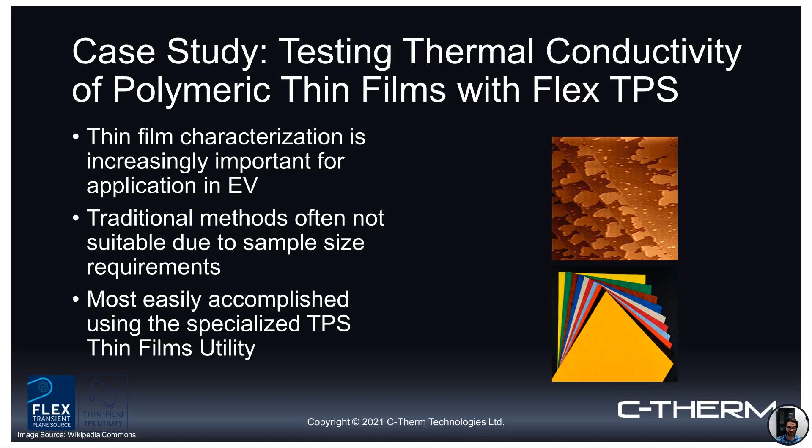And a last look here on one of the final utilities with TPS is thin films testing. In electric vehicles, thin films are seen in various parts, in the battery separators, as was mentioned earlier, different polymer-based films. And thin films introduce a somewhat challenging sample format for certain methods, really just related to the sample requirements that are sometimes needed. But again, with the TPS thin films utility specifically designed for thin films down as low as about 10 microns, this is something that can be used for this type of analysis.

Your thin films testing procedure is a little different from what you might view as a traditional TPS test, but essentially involves this layering of the thin film, upwards of 2 to 3 total layers with a singular or common backing material. And here we're varying the thin film thickness to increase the insulation component of that temperature change. And in this way, the software is using that information to determine the thermal conductivity of that thin film. So it avoids needing to layer up dozens and dozens of films to create a sufficient sample stack. Here you can get away with 1, 2, maybe 3 layers of film, and it's a great option when you're looking at that pure thin film measurement.

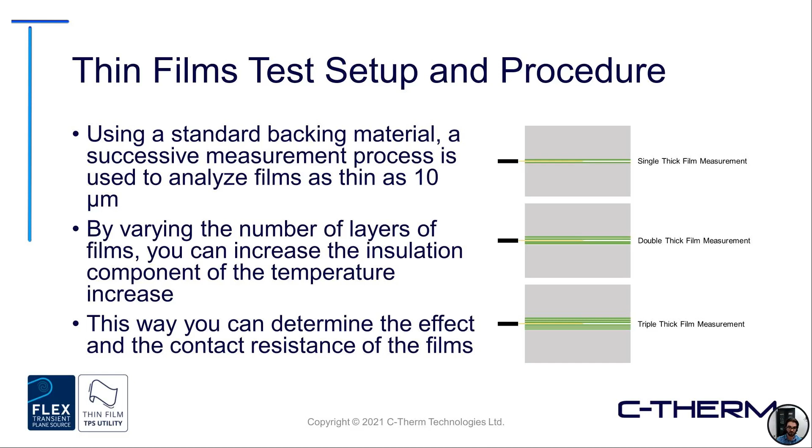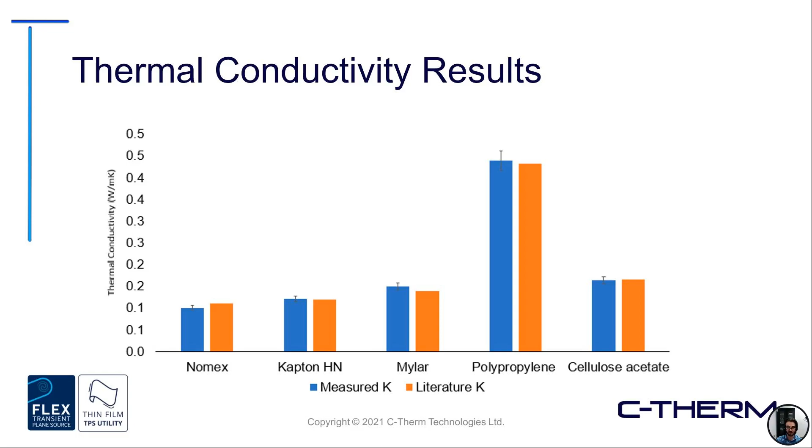So just some results that were obtained here on some known materials, Nomex paper, Kapton, Mylar, different types of these polymers, again showing really great agreement between the measured and literature values for those samples.

And finally, one that's not talked about as much, the TLS, the transient line source. But I do just want to have a quick note of it here today before we wrap up. Really great for those viscous liquids, polymer melts. Convection errors are most prominent in thinner or lower viscosity materials, so those are always best tested with MTPS. But if you're dealing with samples that are thicker, anything above about the 50,000 centipoise range, like anything ketchup or above, if you can imagine ketchup as the consistency reference here, these are types of materials that are really great for TLS. Also appropriate for MTPS for sure.

So just some conclusions here. EVs, as we've run through here today, incorporate such a wide range of materials. There is no one measurement technique that can do it all. So again, having access to those different options really gives you the best chances of getting those accurate and valid measurements. And the speed of analysis, this is also really crucial. As mentioned, transient is going to be the fastest possible measurement technique to get these results.

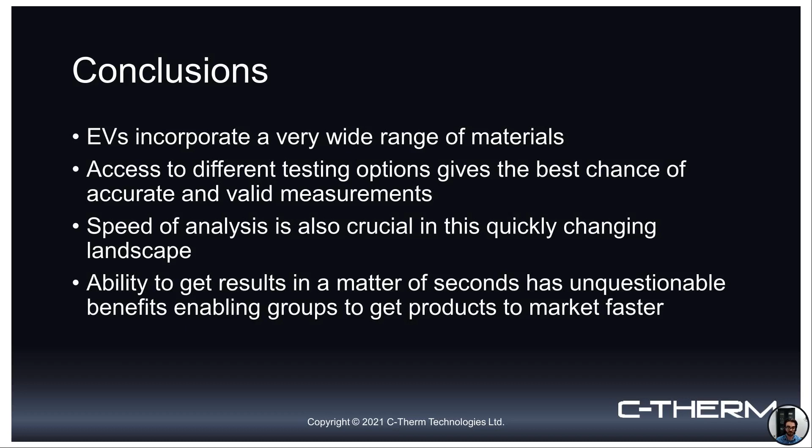And as Adam alluded to earlier, if we're dealing with a significant change that's going to occur over the matter of years, every second counts. So whether you're dealing with an emerging material, R&D development, whether you're doing product testing, QA, QC, speed is going to be really of importance here. And this is why transient measurement techniques are really going to be a great fit in this type of market.